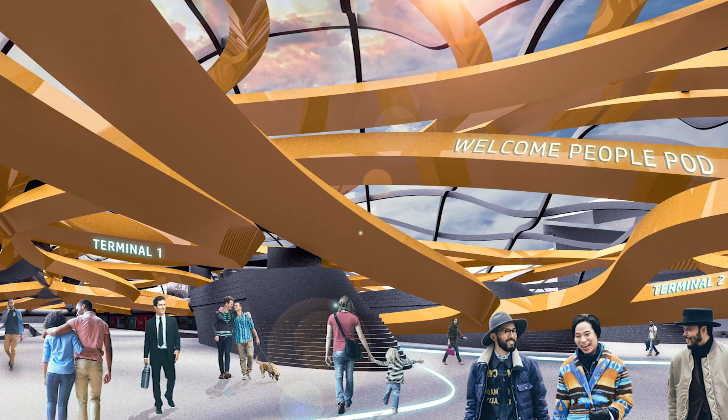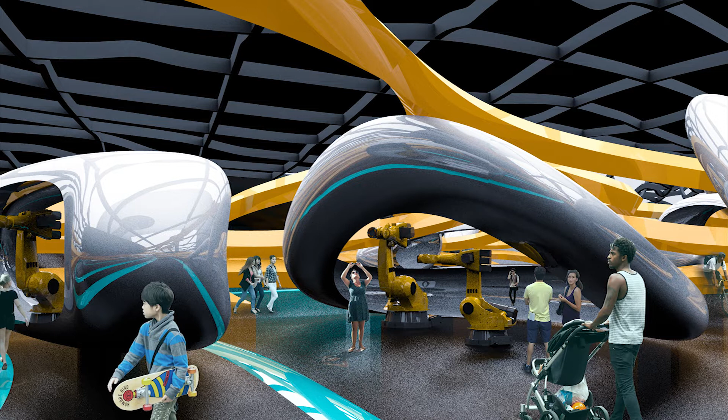Positioned to the north of Lambeth and rising over 50 meters in height, the striking people pod is the centrepiece of Waterloo, a new residential neighbourhood being envisioned above Waterloo train station, rising from a challenging site to deliver a unique profile and a range of living pod types within a diverse and vibrant new neighbourhood. This is the story of London's first on-site automated construction of the new residential towers.

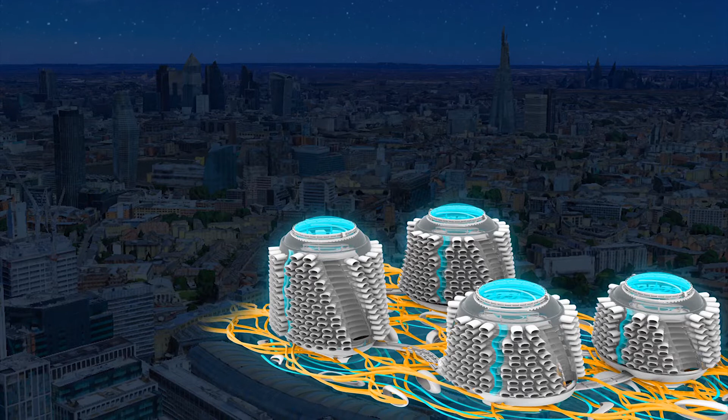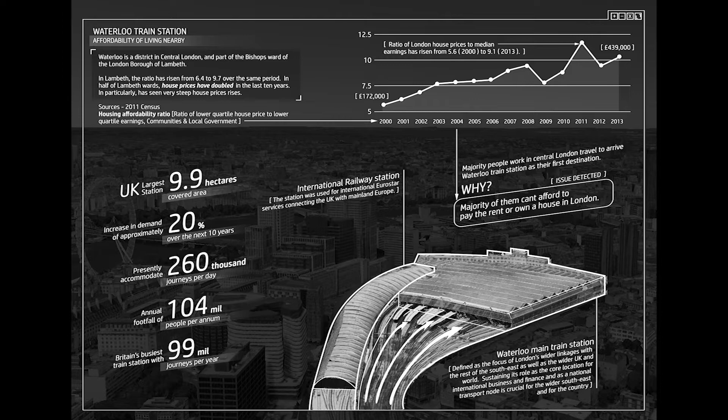Sitting at the very heart of Lambeth, first growing into a major transport hub as a result of transportation links established in the 19th century, Waterloo is now being reborn as the 21st century international transport connection that has been created. And with the International Railway train station next to the existing railway station, Waterloo train station is sustaining its role as the core location for international business and financial dealings, continuing to attract businesses and young commercial talent from across the UK, which benefits from the area's underground tube lines, mainline station and high-speed international rail service.

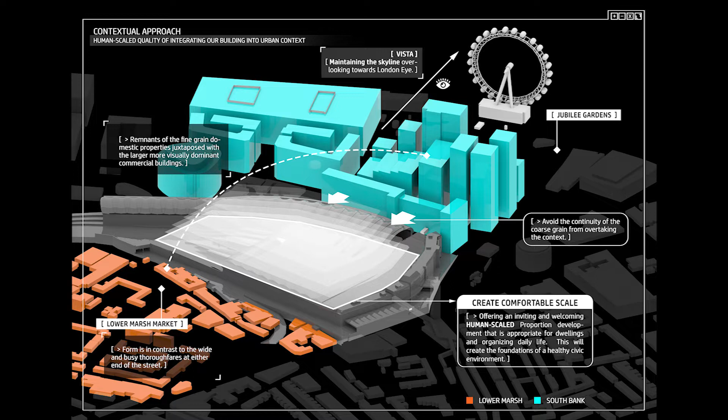Facing the Thames riverfront, its prime location has driven a considerable amount of business, already lifting property prices for miles around, yet demand for living space is increasing its appeal to continue to evolve and improve. As the demand for delivering mass housing programs has increased every year, however, it has hardly achieved the goal set out to resolve the problem. One of the reasons for this is because part of the land is owned by private sectors, which have no intention to build affordable housing.

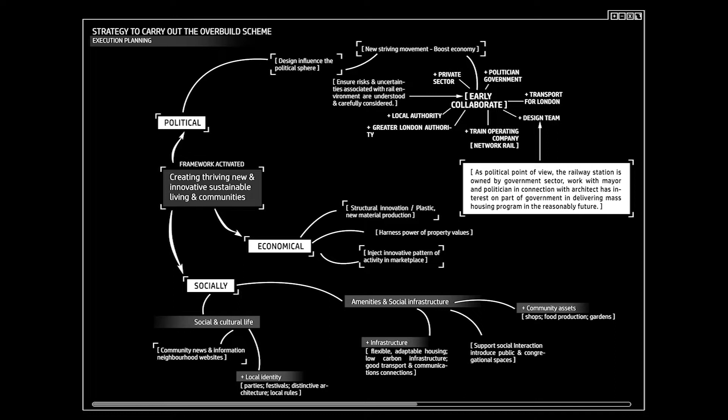In response, from a political perspective, the railway station is owned by the government, and in order to materialize this proposal, it requires immense input and support from the City Council, the Council Mayor, and the political arena to work in tandem with an architectural authority having the same interest and a common goal to deliver this mass housing program in the creation of a vast new neighbourhood in the reasonably immediate future.

The proposal will also require bringing in structural innovation solutions, such as implementing plastic properties as the main driver to build the structure in modular pieces and sections. This can harness the power of a new market in terms of quality and character of community living in a new habitation manner. To make mention of materials, it is a particular and personal interest of mine to explore the reutilization of one of the world's most abundant wastes, that is plastic. Plastic can be reused and harnessed into becoming highly potential building materials. Plastic has also become a global commodity in a worldwide market.

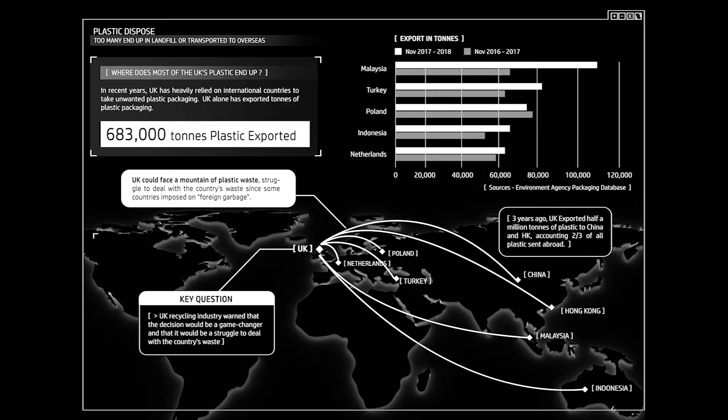We see plastic waste being traded across the globe, where it is collected, transported, stored, then processed and created into a renewable product. With new design innovation being generated, new approaches and solutions to harness positive constructability from plastic waste, it is ideal to implement inexpensive methods and recycling processes for common consumer usage. Plastics are generally low in cost and value, and possess the versatility to be formed into any shape, size and design. And its property is durable enough to last up to 450 years, which makes these materials extremely viable as a beneficial contribution to the construction line.

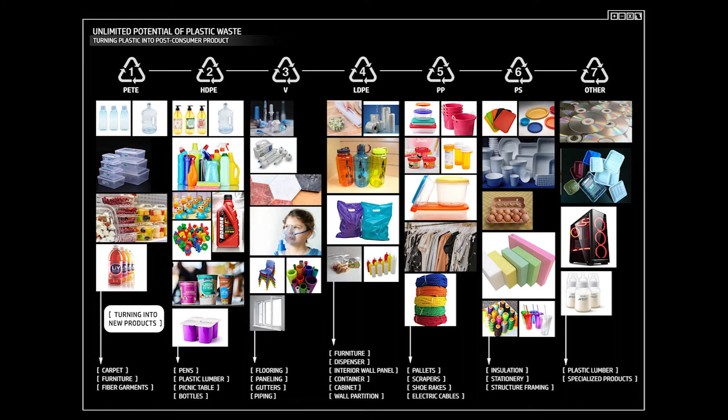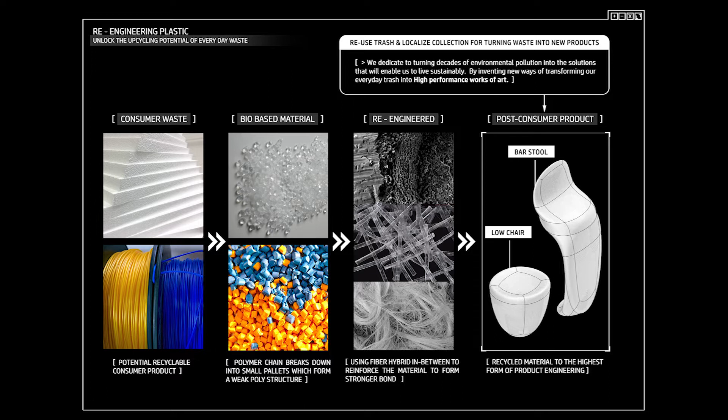I look forward to demonstrating the unlimited potential of trash by taking recycled material and successfully transforming it into the highest form of product engineering. The great enabler for this goal is the ability to demonstrate the feasibility of environmentally serving technology which competes with and often outcompetes more traditional and far less sustainable technologies. We are not just about being green, we are about being efficient, practical and able to create affordable houses for Londoners which we all could truly call our home.

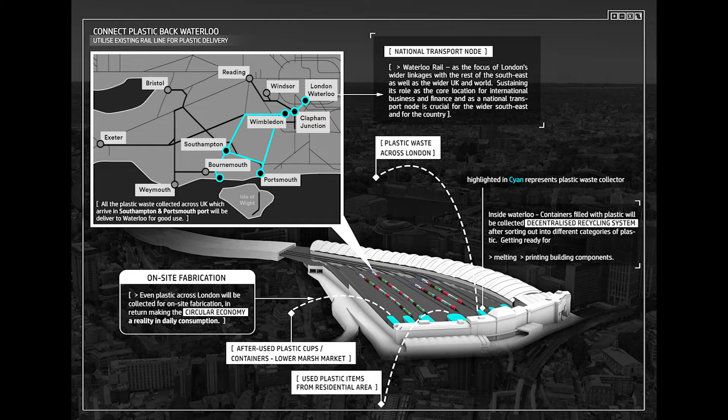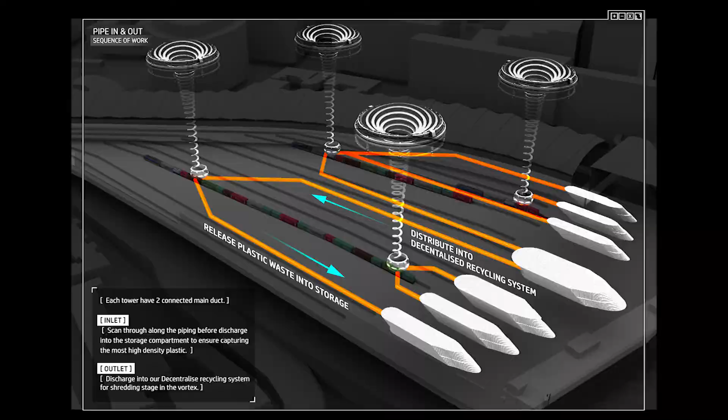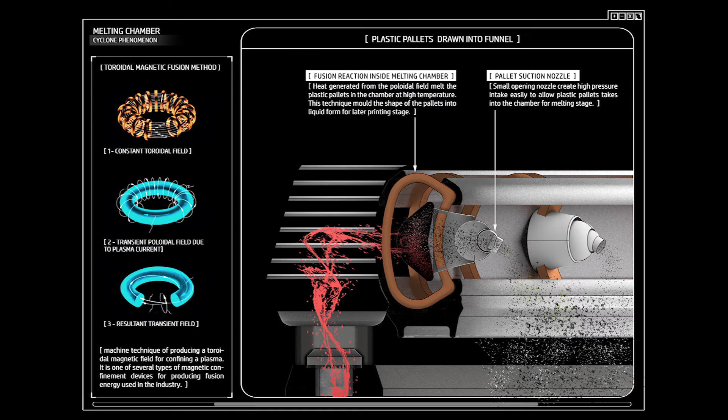So since Waterloo Station serves the wider southeast, all the plastic waste collected across the UK which arrives in Southampton and Portsmouth Port will be delivered to Waterloo, collected in our storage area and later distributed into our decentralized recycling system, ready for shredding processes to form into pellets before discharge, pellets for the melting process in a vortex. How it works is the idea of air pressure pushing the plastic pellets from the lower level to the top melting chamber. All these pellets will later be molded into liquid form for the later printing stage.

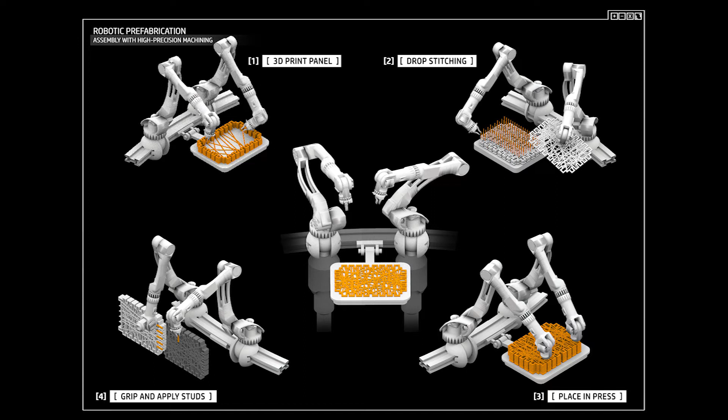Inspired by the hydraulic piston system equipped with attached robot's arm to hoist the vertex structure up and down during the printing of each inhabitant pod. With a total of 8 robots working hand in hand, they 3D print each individual panel in sequence and join it together. In between each piece of panels house the stud bolt fixture that provides a positive lock against turning and loosening, resulting in less wear. This extends the life of the threaded hole of the panels in the block over a period of time.

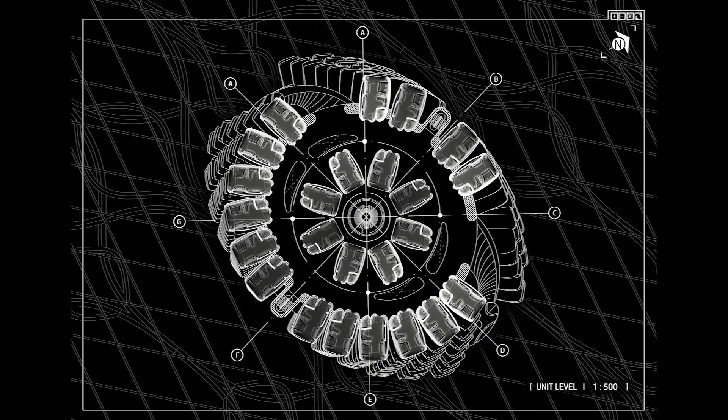While many residential towers are notable for their height, Peopleport used its 50-meter profile to express the range of apartment types that it contains. The structural facade is twisting each living pod wrapped around each level to create a dramatic outlook silhouette. By taking things further, rotating each living pod at a 3-degree angle while maximizing light and sweeping views

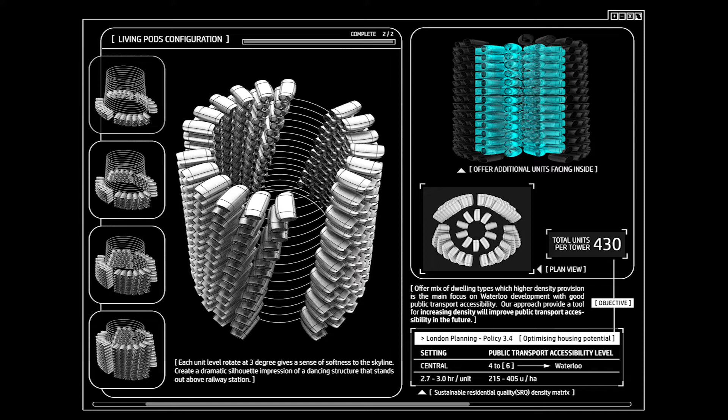across London, offering mixed dwelling types, with higher density provision driving the main focus on Waterloo development to meet the sustainable residential quality density matrix at a number of 430 units per tower. Reimagined, we will see a new life breathe into the site with 4 new towers, bringing nearly 2,000 units of housing rising to a height of 15 stories and becoming the first plastic recycled material residential tower in London.

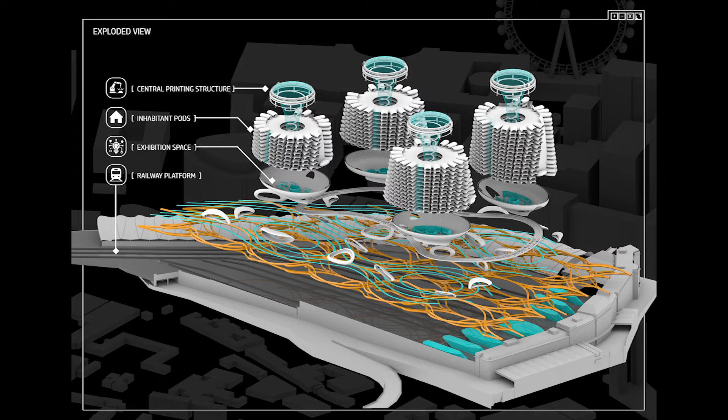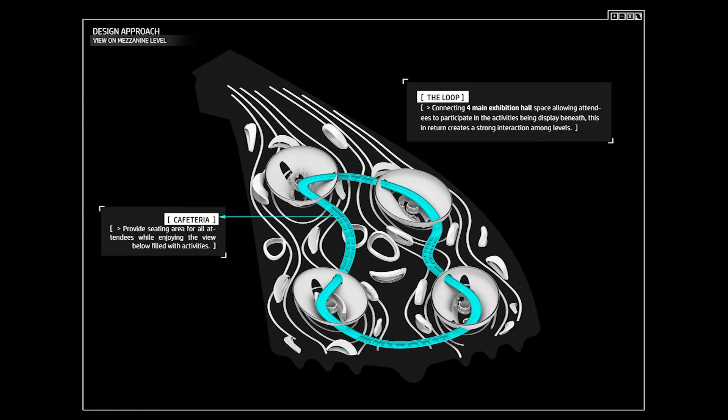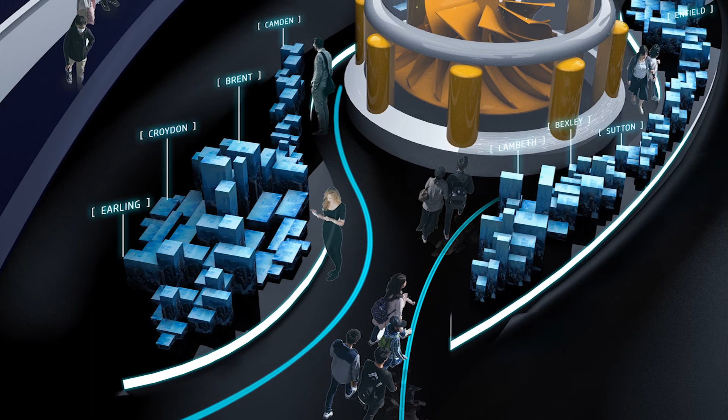The new proposal further enhances the appeal of the area below the residential towers, making use of terraced flexible floor plates with exhibition space, cafes, and public amenities opening through the area, creating a modern and vibrant learning destination which becomes home to the robotics interactive manufacturing playground, with a strong emphasis on human and robotic learning for the community, introducing categories of activities from learning and purchasing living pods, showcasing the potential of the SAM concept applied to serve affordable housing for future expansion development in other boroughs.

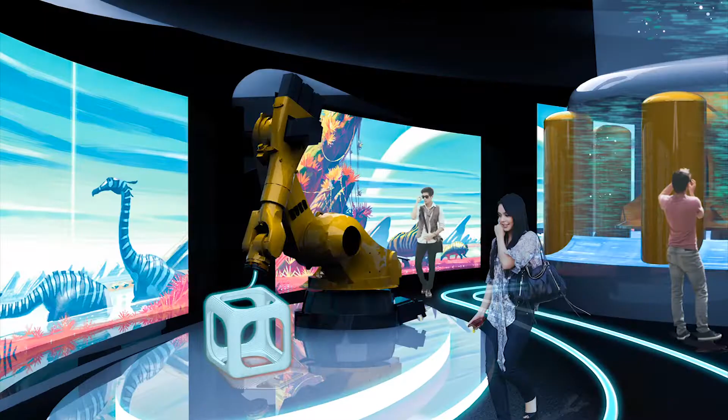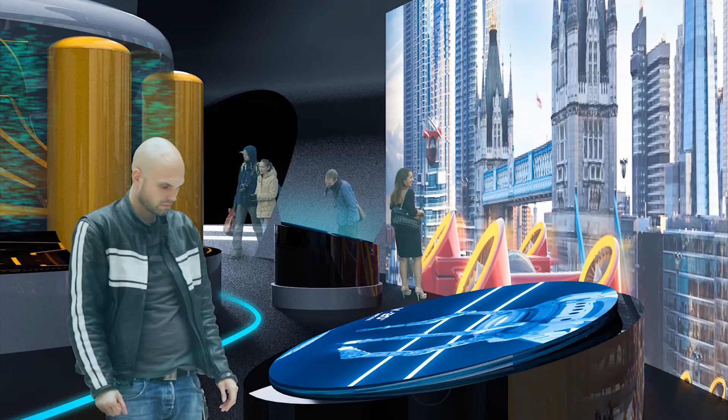To be part of Peopleport is simple, very easy. Our interface will guide you through the simplest method to choose your desired unit. All you need to do is register and log in, and you will be introduced on how to use it step by step. If you encounter any problem, no worries, you can check with our operator right below that will guide you and even consult on your decision making.

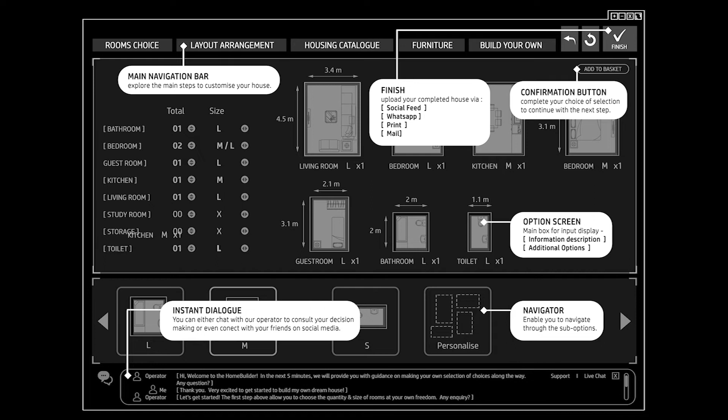Firstly, you will need to choose your room types and size. Our system will model your pods based on your preference, as each pod will have different shapes and sizes. Our system also showcases the current build status, and with our connected app, feel welcome, as you can get connected with your future neighbor at a much earlier stage. Get yourself familiar with each other, creating a strong bond, elevating community living to be part of the family.

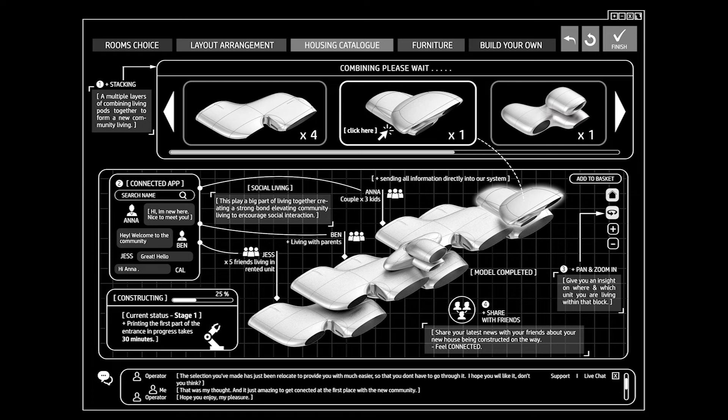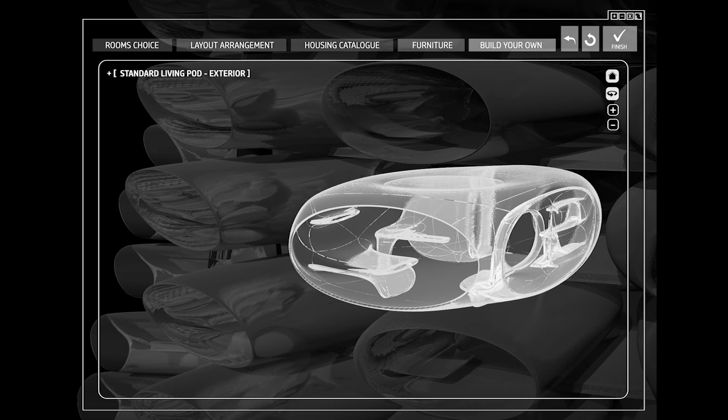And we even provide a list of choices of colors and shapes of furniture to choose from, or you can even build your own. You can customize and upgrade your pods to have different color combinations, just like this, or go with our standard living pods that come with a level of translucency that evokes the language of plastic properties on the surface. The interior has built-in furniture ranging from bed, shelf, open kitchen, and never forget the extensive view out of the glass to the River Thames.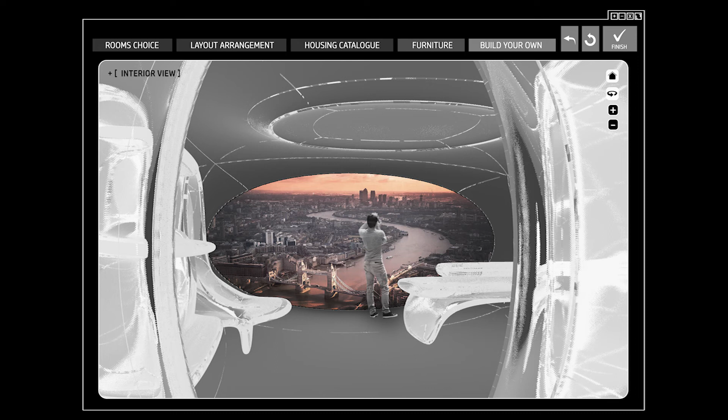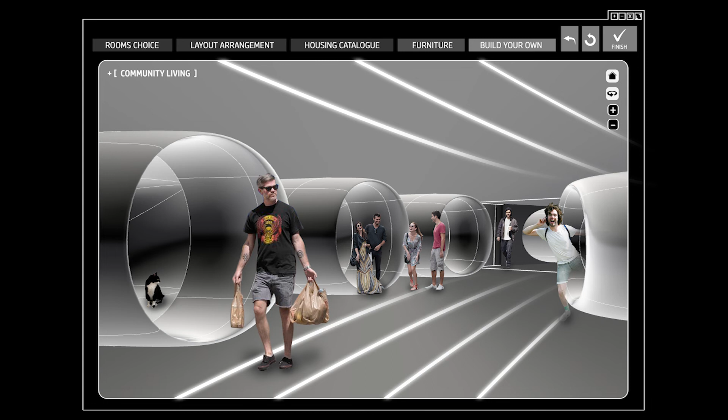Floor heating and cooling, lighting, and water supply system come with the package. A view inside the living pods at the corridor encourages social interaction, and also an immense view of plastic pellets taken up through the vortex. So once you have completed, you are able to share your completed customized pods with your loved ones and your friends.

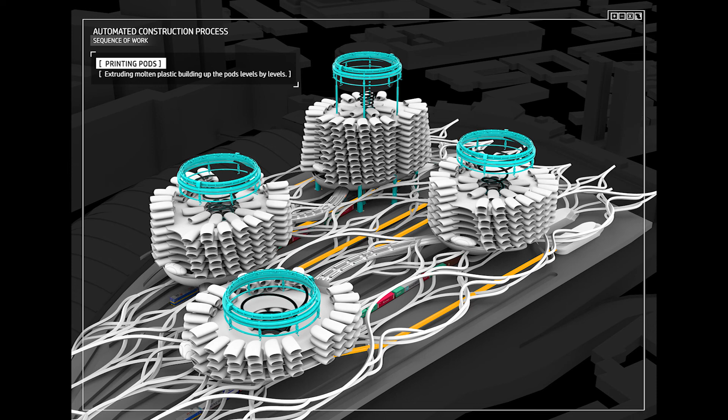In conclusion, rising from London's busiest train station, Waterloo adds a significant new element of fabric to the UK capital, set to deliver new homes above the train station and becoming the first piece of the central London jigsaw solving the issue of affordable housing. Peopleport is set to make a notable mark on the skyline and start the next chapter in a remarkable history of London, an impressive centrepiece to a compelling new neighbourhood in the district which we can all truly call our home.